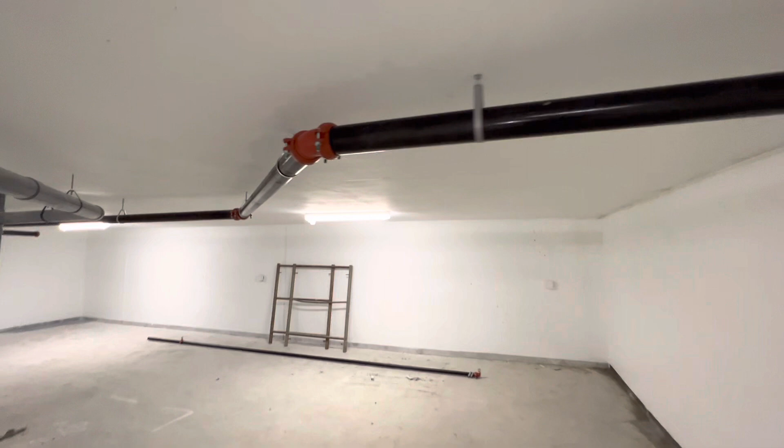As you can see here, I'm running a 3-inch pipe and I had to get around the wall, so I had to offset with 45s.

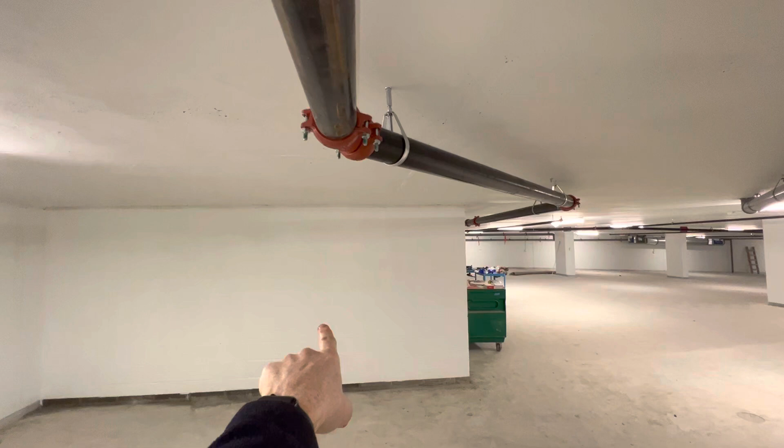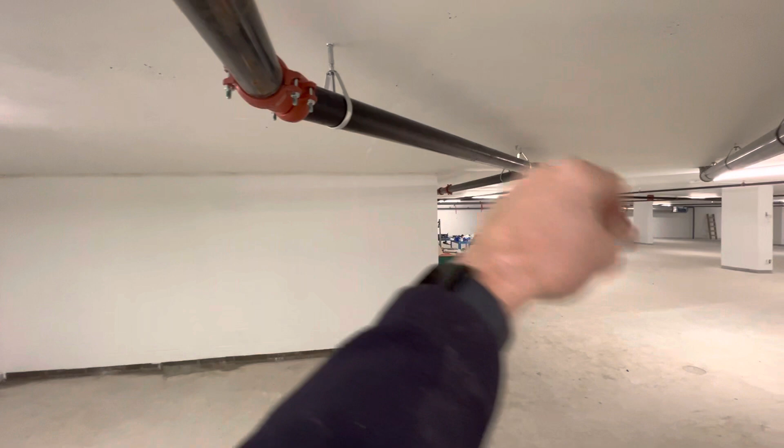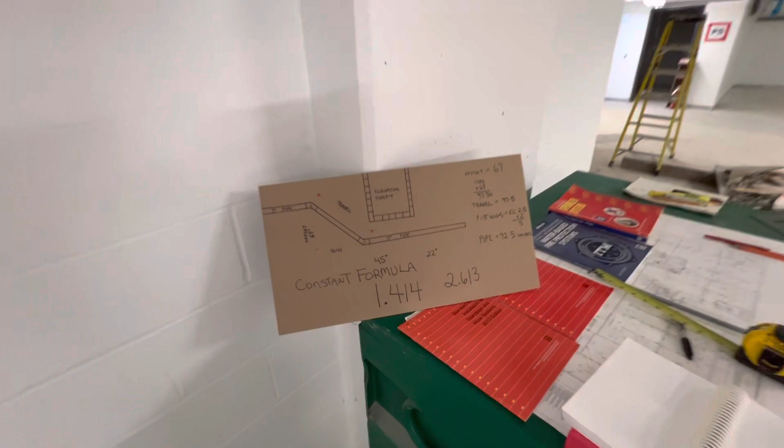And the way I calculated it, I went to the wall, marked on the wall so I can get my center to center measurement. It was a lot easier since I don't have somebody to hold the tape for me, so it's just me. I get a line to the wall with my line laser, then I mark the wall, and from the wall to the center of the pipe, I get my measurement. That measurement happened to be 69 inches, and that would be called the offset.

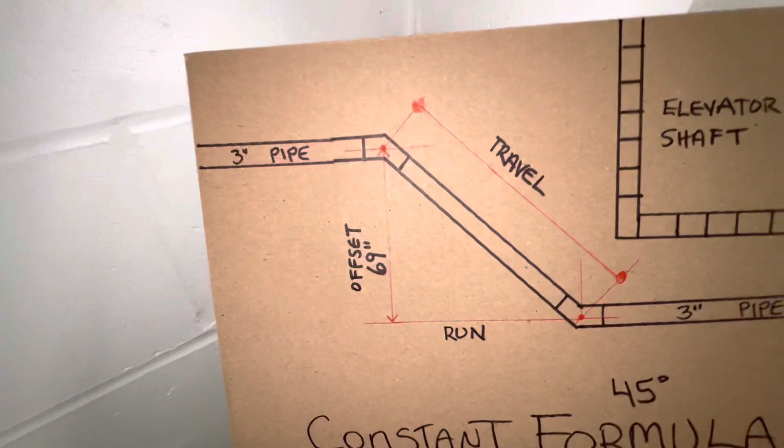So there is a formula to use, and it's here. 3-inch pipe, I got my offset at 69 inches, and the pipe we're going to cut is the travel. That's what they're called in the mathematical formulas, and this would be the run. That one's not relevant for us right now. It's just the offset and the travel.

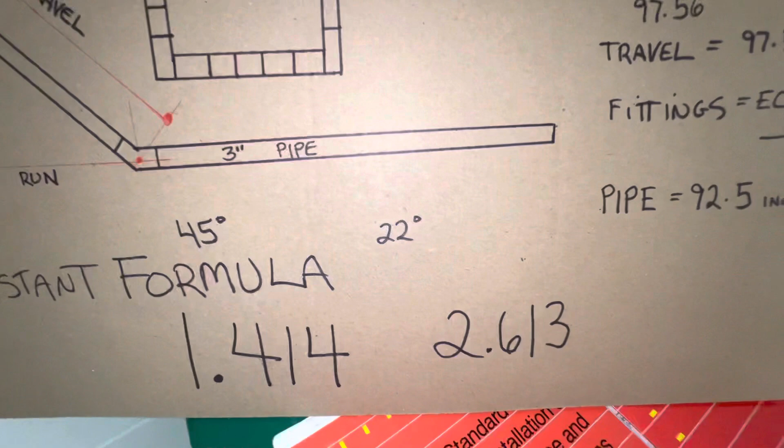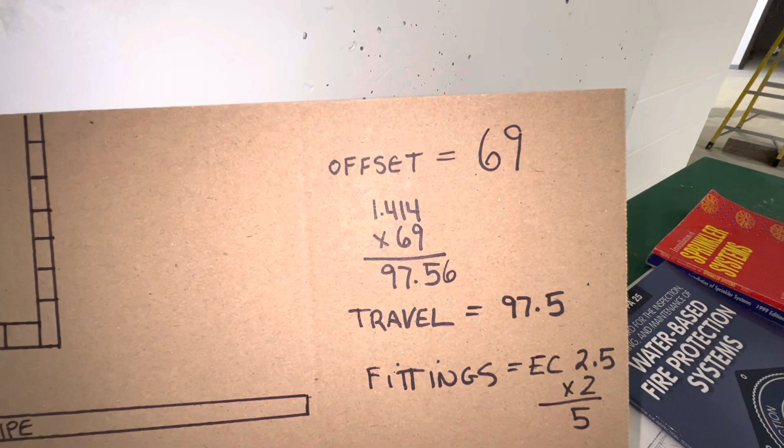So the constant formula is 1.414 for a 45 degree. 22 degree is 2.613, but we're not using that one today. So if you calculate 69 inches times 1.414, it comes out to 97.56, 97.5 inches, just to eliminate the 56 to 0.5 anyway.

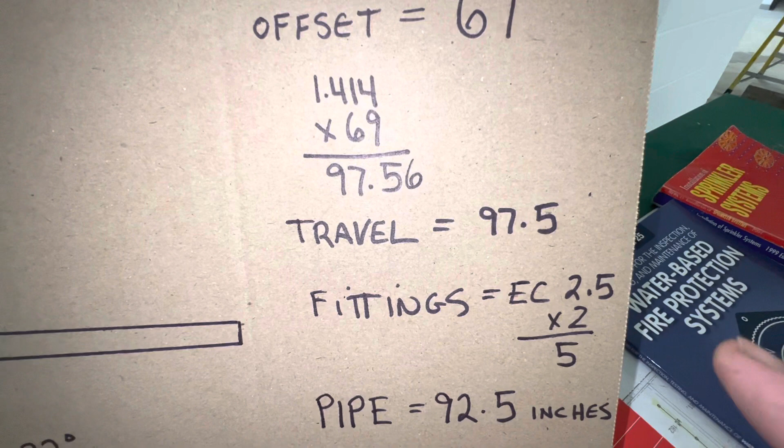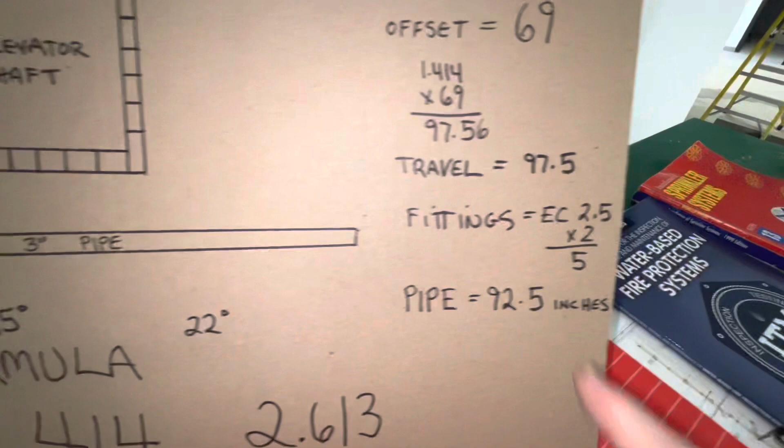And then after you get that measurement, you got to subtract your fittings. Each fitting will have a set end to center measurement, and the 3-inch 45 will be 2.5 inches each, so that's 5 inches. End to center 2.5 times 2 is 5 inches. So your 97.5 minus 5 inches is 92.5.

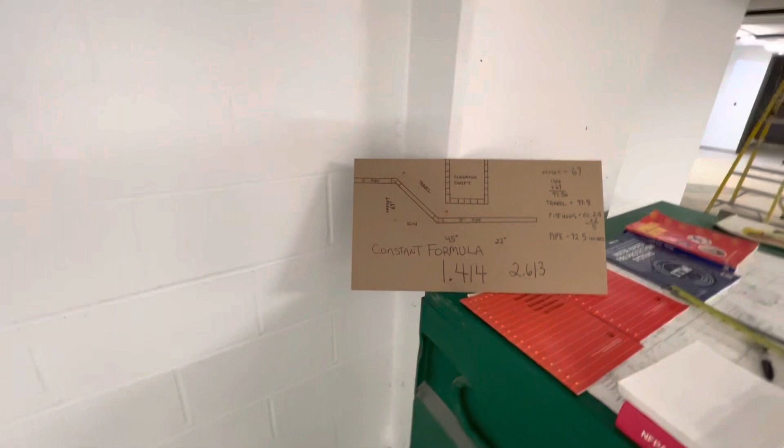So 92.5 would be the pipe I cut, and that would be this pipe here, and it worked out perfectly.

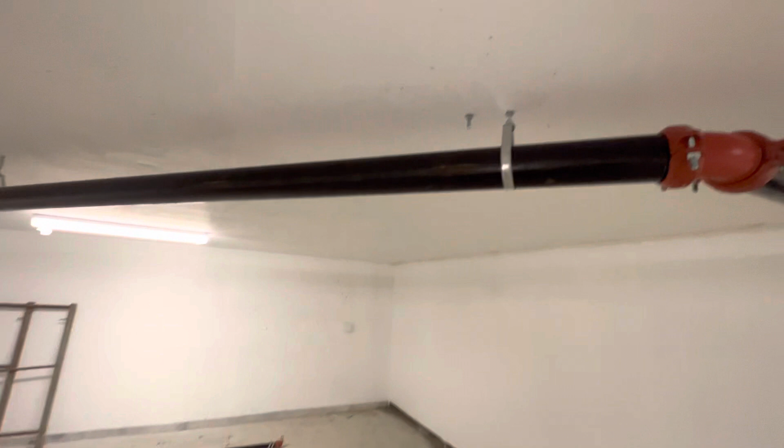I haven't used this very often in 30 years, but sometimes you'll come around an issue where it's just helpful to use the quick formula. Most of the time you'll just hold your tape measure there and give it a rough eye. But this time I had both pipes installed, and the piece in between had to be exact. You don't want to cut it a few times, it just takes time.

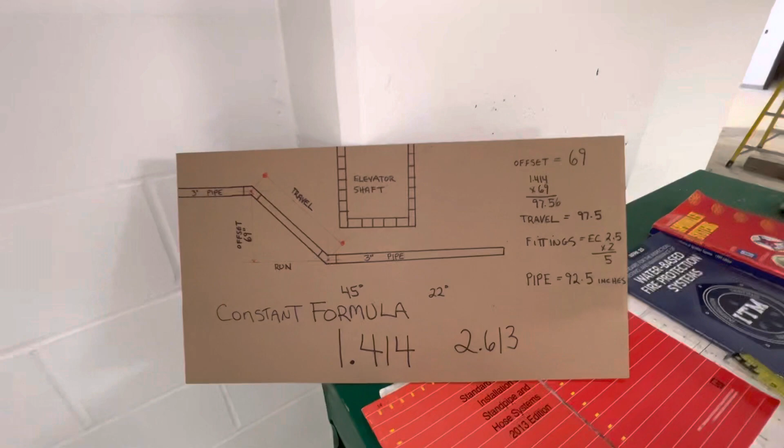And sometimes you got multiple pipes in a row with each other, several in a row, and you got to have certain measurements to get them all to line up equally and the same spread distance. So it's just helpful to have formulas and know your formulas. You're going to have to learn it in school when you go to sprinkler school, piping school, plumber school, whatever school you're going to, steam fitter school.

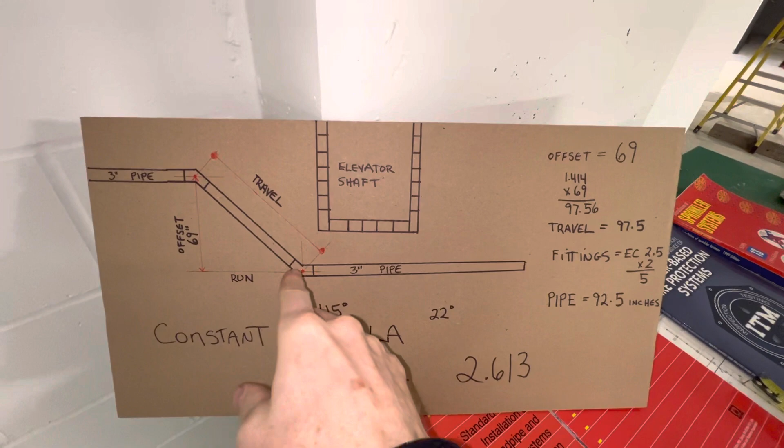So that's the formula for a 45 degree. That's an offset. Now you got different kinds of offsets. You got a rolling offset where the pipe would not only change direction this way, it would also change height as well, and that's called a rolling offset.

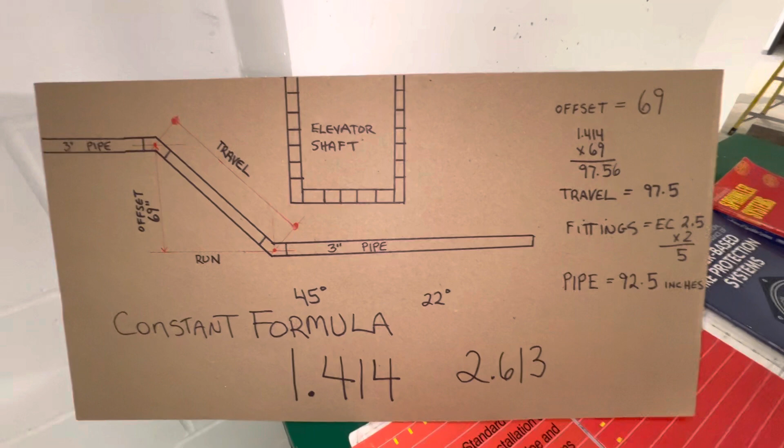They're a little more difficult to do because you got to get more measurements, but that'll be another topic. You don't come across that in sprinklers very often, but mostly in the industrial field for steam fitting, pipe fitting, industrial piping.

If you're interested, there's a book that talks about it, and it's called the IPT Pipe Trades Training Manual by Robert A. Lee.